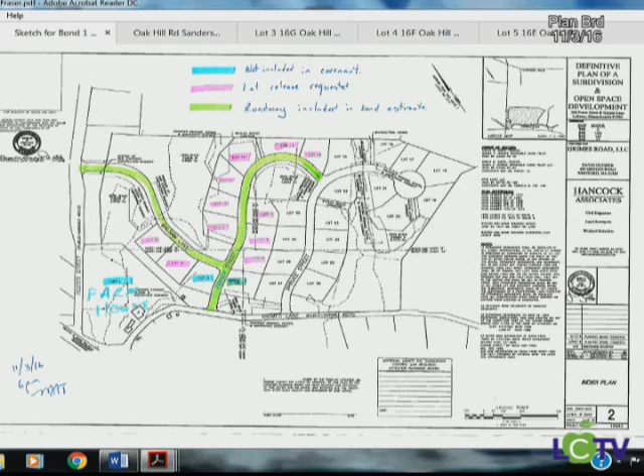So the covenant, the restrictive covenant and the cash bond would be the bond for the subdivision. I don't know how far you want me to explain this. No, we're all right.

So you have a lot release request for lots 2 and 5 through 14. Need a board vote to release those lots. If you release those from the restrictive covenant, that allows him to pull building permits. Any questions?

He's not gonna get the final until the covenant's in place and all the other requirements are met. Is it in place? Yeah, the work, the construction went very quickly on the roadway. There were a few extra inspections, but the inspector liked what he was seeing. He was happy with it.

I drove out there last week, and it does look pretty nice, even the job sites are clean, which is pretty good. They're good to go then, as far as I'm concerned. Yeah, I saw the job site too before I left, and it looked great. One house was up and the foundation was in. There's two houses, one's sided and the other one's, rafters are going up I believe, and that was about 3 weeks ago. It looks clean, looks like a good job.

Do we hear a motion? I make a motion to release the lots 2 and 5 through 14 as soon as the bond is in place. Second. Yeah, once we get the cash. All those in favor? Aye. Opposed? No.

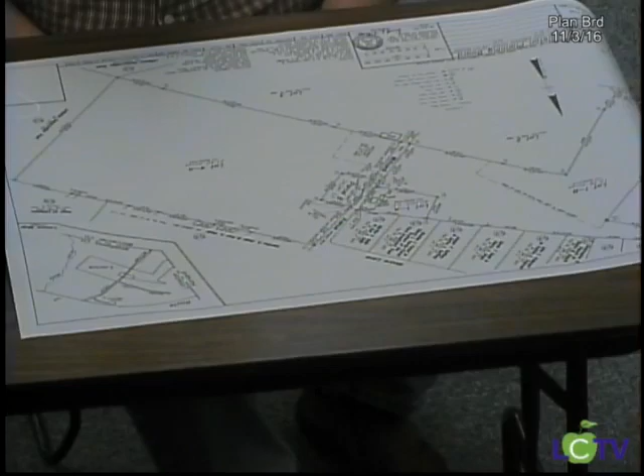So who gets parcel B? This section right here - I believe the house was up for sale and parcel B was created for conveyance, to be conveyed with lot 1A, the house lot beside it, across the street. Yeah, it goes with 1A. Parcel B and 1A are together.

That's 24,000 square feet. How many feet of frontage do we have? Is it going to be on the same deed? That's probably why it's a parcel, because it can't have the road through it, so it has to be two separate lots. How many feet of frontage does it have?

Does it say on here possibly it's not a building lot? It does. How many... is it in the notes? How many does it have? Parcel B is not a building lot - 177 feet, so it could be a buildable lot.

It's 24,000 square feet, I don't think it meets it. Was it subdivided? Right now, right now. It wasn't cut off before and they're just separating it now. Okay, well I don't see any issues with it. Anybody else? I don't either. There's plenty of frontage - Approval Not Required.

Well, that's not the thing. So if you want, I'll make a motion. Motion to approve ANR for 189 Whitcomb Ave as presented. Do I have a second? Second. All those in favor? Aye.

If you could take a couple minutes and just sign it now, we can send him on his way. Do you have a Mylar? If you could do two paper copies and the Mylar, that'd be great.

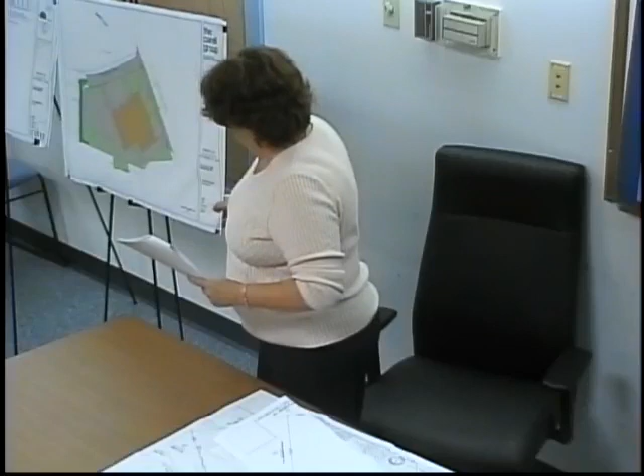With the proposal, a couple of key things: the existing building will remain, the brick building up front, historical, the one that used to be the town hall way back when, and the new building will be built around it and in back of it. So the existing building is roughly along the front, and the addition goes around the back.

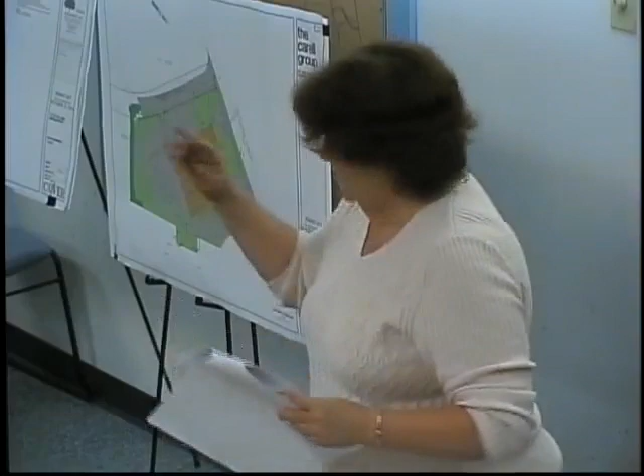The thing about the existing building is that it's not ADA accessible, so one of the key things with the renovation and addition is to make sure that the interior of the building is accessible, and that is part of the design that I'll show you with the building plans in a moment.

The resulting building footprint is 17,600 square feet with a gross floor area of 20,700 square feet. The overall impact to the site has significant improvements over the existing conditions.

Right now, in terms of circulation of the site, the abutter has access to their garage right from the same driveway that the fire department uses. If you were to go out there today, you'd see that a lot of the volunteers and personnel park diagonally on that side. So you have a conflict between vehicles coming into the fire station site, exiting the fire station site, and people parking there as well as the abutter.

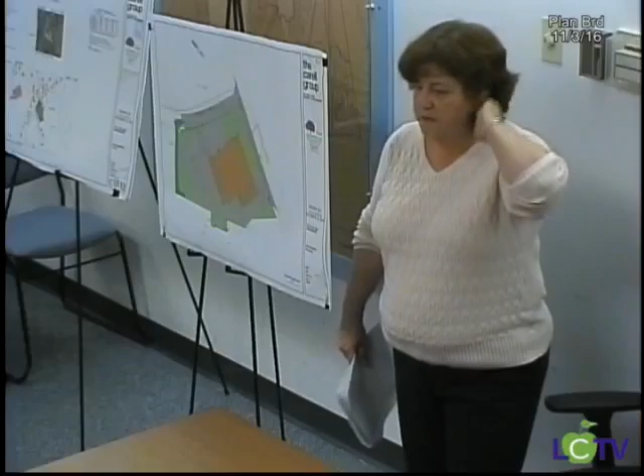Under the proposed conditions, what we're proposing is to allow the abutter to continue using the access to their property. That was part of the agreement worked out with the chief and the abutters. We couldn't find a written easement, but everyone's trying to be a good neighbor, so we're maintaining their access to the site. They also have a ramp area in the backyard, so if they need to get in to prune trees or something, they can get access to it.

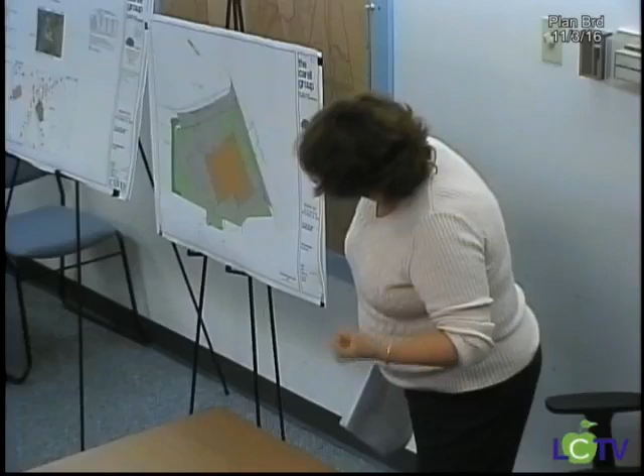So we're maintaining that. We've also made provisions in construction documents to make sure they have that access throughout the construction process. With the internal circulation, once you're past the abutter's driveway, the main use of this access point is going to be to gain access to their small apparatus bays on the side, brush truck, smaller vehicles.

The main parking area has been relocated to the back of the building with apparatus bays and a concrete apron facing Wilderness Road. Because of the heavy weight of the fire trucks and turning movements, we have heavy-duty pavement coming all the way around the building and down Wilderness Road for the distance we expect the trucks to be turning.

So we expect that traffic circulation for use of the station, instead of vehicles turning around on Foster Street, will now be relocating more to Wilderness Road. So it'll improve the overall site safety.

So you're gonna take the vehicles out of the back of it, the fire truck decides to go on a fire call, it goes out the back and turns to the right. Oh, you just said you're gonna pave Wilderness Road more? You're gonna connect Wilderness Road with the parking lot?

Correct. It currently is connected to the existing parking lot, or what is perceived as the parking lot now. What we will be doing is improving the quality of the pavement so it can handle the turning motion of a fully loaded pumper truck or the ladder truck.

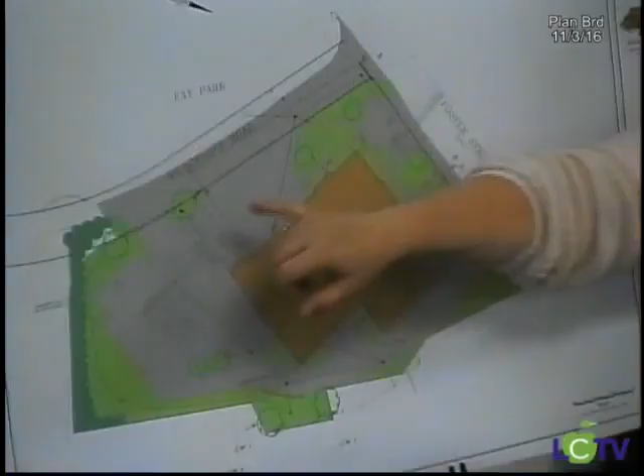We have 25 spaces in back for general purpose. Another feature of this design is the fire station contains a training tower, located in this back corner, so that by having control over the parking spaces in that area, we're able to move the apparatus in and around the training tower, which they'll be using for training, I believe, evacuations and confined spaces.

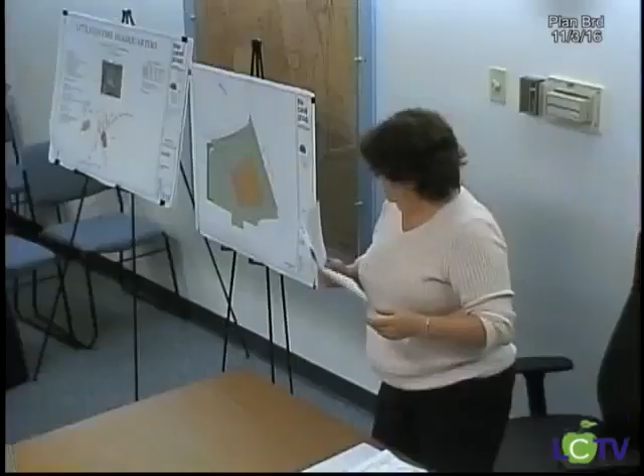It has multiple props throughout the tower. It's basically a two-level system inside that has fire escape material, the metal, and there are grate-type structures that can be removed with anchor points in the ceiling so that we could do confined space training, like through simulated manhole covers, rappelling through metal exterior windows so they could throw ladders to them without damaging any of the brick or anything like that.

Do they have the Hollywood-style fire that comes out the windows? Yeah, we'll work on that.

So I think the key thing here is that the rework of the site plan, the traffic, and the parking has been done with keeping in mind the use of the property.

Is there such a tower over in Westford? They have a larger tower. This one is rather small and simple, but it gives us the ability.

Our goal is to also run a sprinkler system inside. There's a cistern underneath the parking lot so that we could actually draw water from a 10,000 gallon cistern instead of tapping into the hydrant system, allowing us to charge and simulate charging a sprinkler system in a commercial building, giving some of that training. It's probably less than half the size of what they would have in Westford.

In terms of looking beyond just the circulation on the site, one of the big concerns and issues with the Water Resource Protection Overlay District is obviously impervious cover. Under existing conditions, the site is approximately 71.6% impervious, and under the proposed plan, we are at 71.5%.

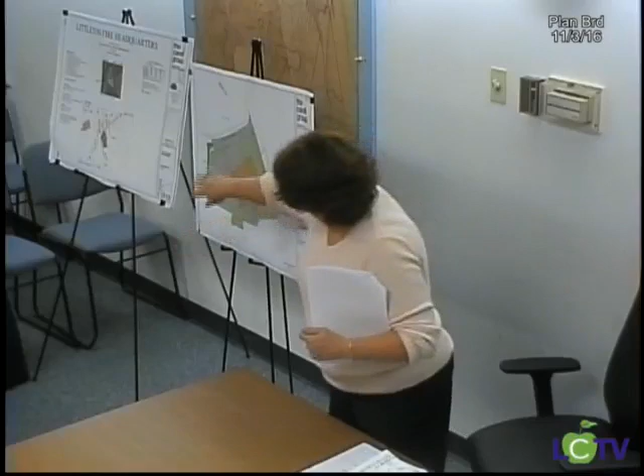Currently, there are catch basins throughout the site and under some of the buildings that capture water from Fay Park. If you've ever been over there, there's a sluiceway so they can pond the water in Fay Park. It works its way through the site and eventually comes to a catch basin out on Foster Street.

We worked with Jim Clyde from the Highway Department to look at different alternatives. What we've come up with is that we still need to maintain the hydraulic connection from Fay Park to the catch basin, so we're reworking it around the front of the site.

This enables us to separate out that flow so that, right now, it gets flushed through the catch basins, and if there's sediment in the catch basin it can resuspend with turbulence and flush through. So this allows the catch basins on site to stay settled. We're also going catch basin to manhole rather than catch basins in series, which will also help.

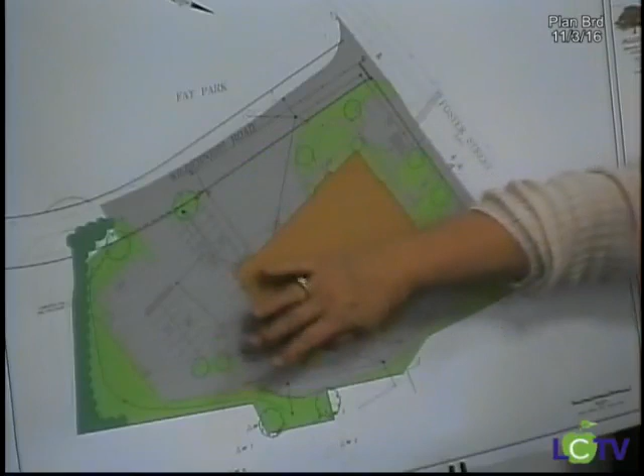The other piece of drainage we have to address is from the abutters. So we're bringing a direct line through the back of the site, picking up the abutters' drainage. I believe they have an interceptor drain, a foundation drain, and a yard catch basin because they have a trapped area, so we are honoring their drainage and bringing it up front.

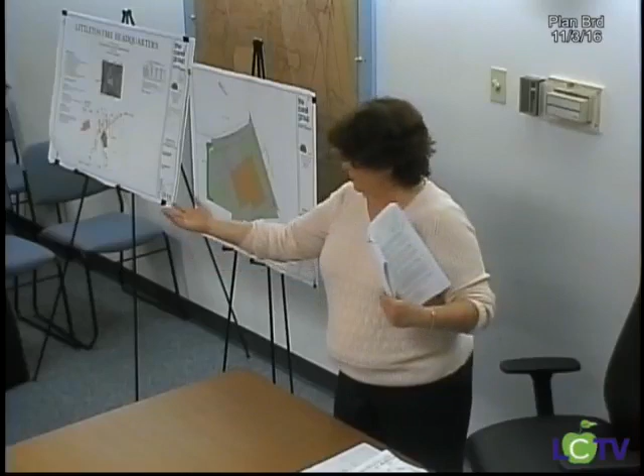We have a catch basin here which will help top off the fire cistern that the chief mentioned, so that they can practice with a dry hydrant. That will overflow into the drainage system in the event that they recharge more than what was there.

So all the drainage will be coming through the front. We're adding the eliminator, which is an oil and grease trap on all of them, so we're getting some improvement with the water quality.

The couple of other key things we're doing is we've shown a snow storage area out back where the snow gets plowed now. And behind that, we're creating a grass swale. This will give us an opportunity to let some of the sediments from melting snow settle out.

We also are proposing a roof recharge area in the front of the station to capture a little over a third of the roof area to get recharged. When you look at all the drainage numbers, it shows that we have a decrease in runoff. It's very minimal, but I think the more important thing is we're trying to encourage recharge where it is reasonable with clean water versus what we have currently on site.

The other thing we're doing is there are floor drains in the apparatus bays. Right now, if water drips off the trucks, it flows out the bay door. The floor drains will all be connected to a holding tank, so that water will be collected. It's a double-walled holding tank with alarms, and when it fills up, it'll be pumped off and taken off-site. So there'll be no connection to either surface or groundwater from anything dripping in the garage bays.

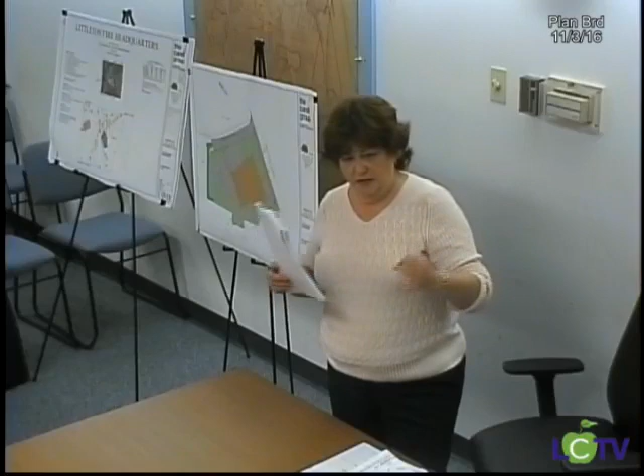That tank will be double-walled. It'll have a drip pan to capture it. It'll have alarms if anything enters into that overflow. And it'll have all the environmental precautions that this board normally would require of any type of fuel tank. So that would be the generator.

The other thing we're doing is we've got bollards all around it so no one can accidentally back into it and jar it.

Other utilities are being upgraded. We're upgrading the water line in Wilderness Road. Right now there's a 6-inch asbestos line, and we will be upgrading it to ductile iron, and that'll also improve water quality. And that's where we will be getting the fire flows for the fire station. Domestic water will be coming in off of Foster Street, as will the gas and electric.

That covers the site sort of in a nutshell, if anybody has more specific questions.

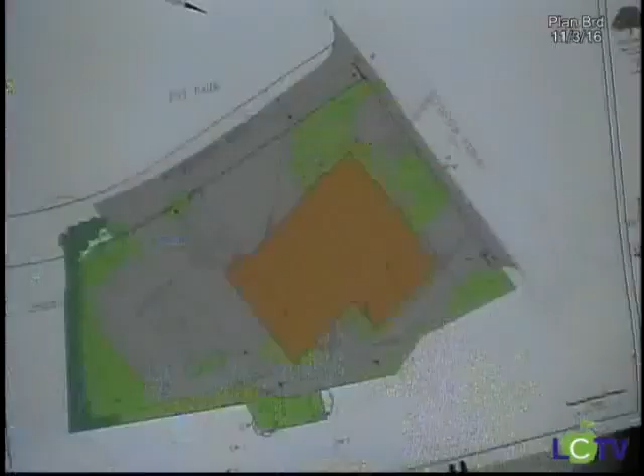So there's a line that runs along the back perimeter, it's kind of a horseshoe-shaped line. What is that? That is, in the grass swale area, our concern was if snow blocked that swale, we wanted to make sure that we could capture the overflow and bring it around to the drainage area. So it's a sub-drain where we've heard that there's water leading out of the hill, but also in the event that the swale gets blocked. Like a French drain? Yes.

Okay, very good recap. Chief, when looking at the impervious area around the new fire station, I understand you need the asphalt for the apparatus. Is there no place that you can decrease some of this impervious area just so that we can get some more recharge into the surface?

Not in trying to maintain the parking. We actually reduced some of the parking in the back already to do that. And the one area that we did increase the grass surface was along this area where we currently have the parking for the call members. We're eliminating all of the parking for the call members, and we actually bumped out the grass surface here about 20 feet, so that it more than doubled the current island that's there now coming into the building.

So that will just remain as two-way traffic in and out on that side. So that was the bit larger spot that we were able to increase, and then it was also a change up here. But in relative to the whole site and trying to maintain some of the parking, we're only able to reduce it by that 1%.

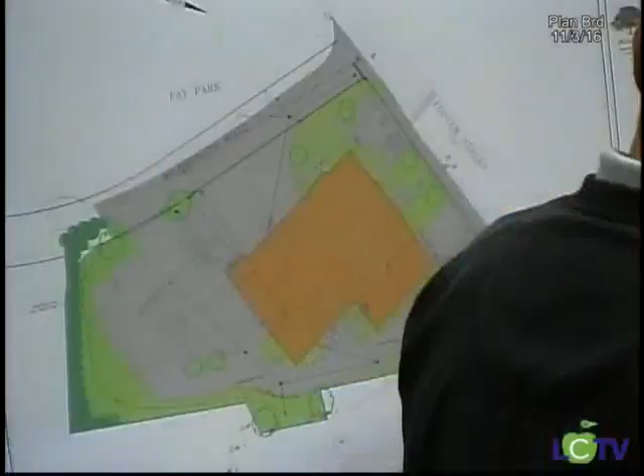I apologize, I forgot to mention, over on the side by Wilderness, which is currently a sea of pavement, what we've got is flag poles in an area for a monument. We don't know what the monument's going to be at this time, plus a bike rack, so it's a quieter area, whereas right now there's parking.

So in line with what we've tried to do down in the village center with the green up front and pedestrian friendly up front and the parking in the back, this fits right into that.

What is the impact of this going to be on the church across the way? You've got 5 spaces, but how many spaces does the church currently use? We have 25 extra spaces in the back.

And how many are used by the church? We know there are people using it on the side, but I don't know how many go further back. Currently there are 20 spaces on the side lot, so this increases that by 5. When the police station used to be there, that was all police parking. So the general parking overall will add 5 more to the 20, on top of the spaces on each side of the Historical Society and up and down the road.

Are they going to be able to get to those spaces in the back? We have a sidewalk coming down the side, and they would just have to walk across. Just not during construction.

In seeing this, I see that the reserve parking is closer to the station, and being healthy firefighters, I can see that you could give these spaces, the reserve parking, to the public and maybe move the municipal or staff parking to a different location. It's not necessarily about distance, it's more about time, not about cost. The reason we decided to keep these reserved for the call members to come in is this is in front of all of the apparatus bay.

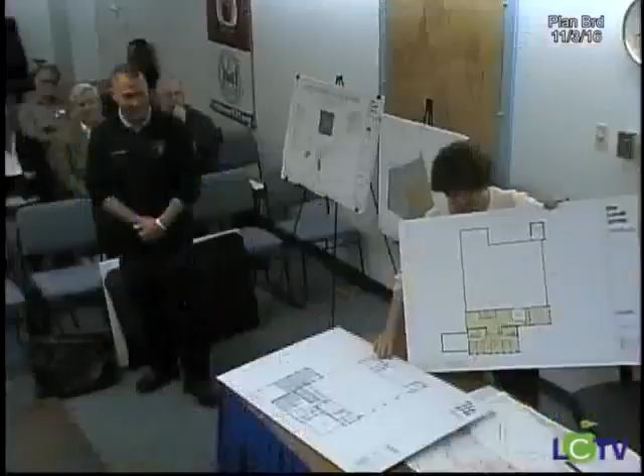All right, next. I will briefly go over the building plans, just because I know you have a lot of other things. You're ten minutes past your time, my dear. You want me to just flip through them, or show them? Flip them. All right, I'll flip through. So, Reader's Digest version.

This is the first floor, the existing station. It's used mostly for public fire prevention and administrative type things. The apparatus bays are the main body back here, and the training tower. We have a carport in the middle of the building where they'll put their specialty trailers undercover. In the back of the existing apparatus bay is where we'll have administrative offices.

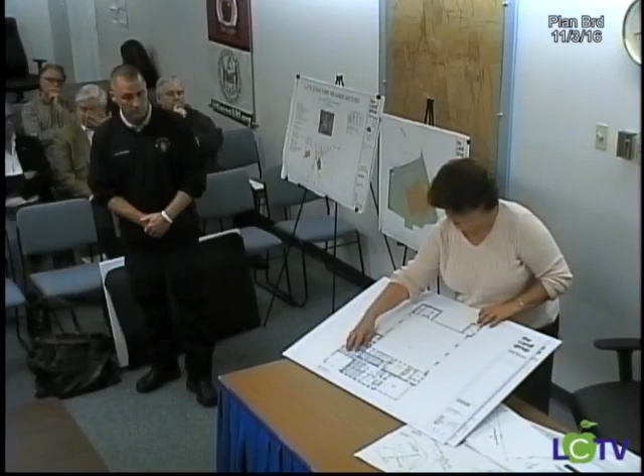The garage in front, the bays in front, will remain and will probably be for the chief's vehicles and smaller vehicles. What is the big space for? It'll be for the utility vehicles, the boat, the ATV. The bottom right is the ATV space, right?

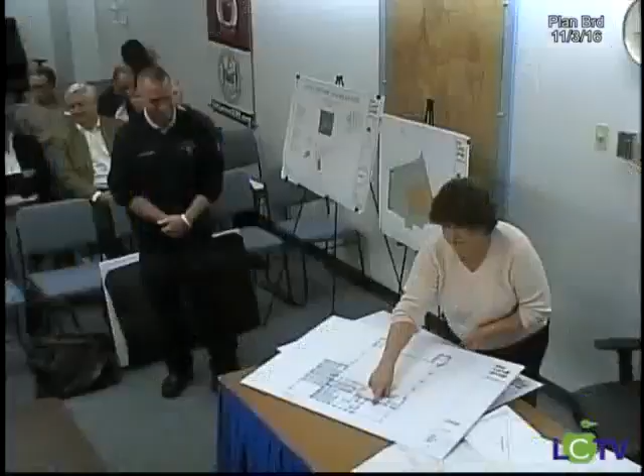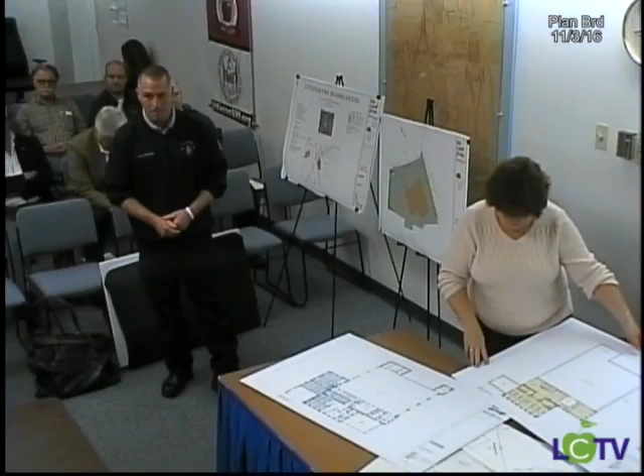That is a meeting and training room. Is that going to be public? It's a public training space that'll accommodate about 48 people. It'll have all the same features, camera, audio, cable TV, and also has its own room so they'll be able to watch recordings and have it broadcast live. It'll be open to other organizations. We can move our meetings over there if it makes you happy.

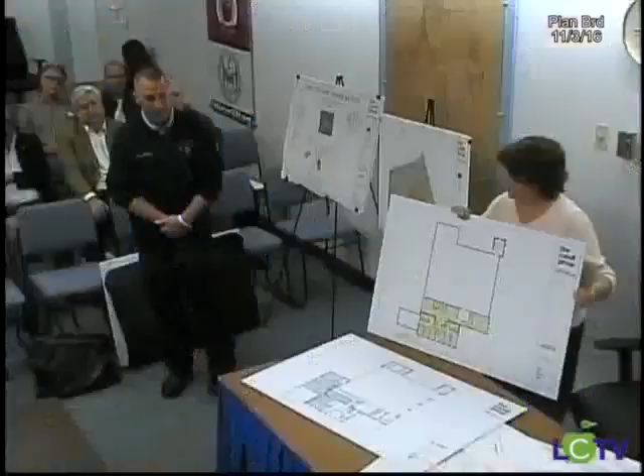The second plan is just the upstairs, which shows bunk rooms for the firefighters, a day room, fitness room, kitchen, basically the staff area. What's in the fitness room? Fitness stuff. That's why you got a training tower, you can carry each other up and down the stairs.

We'll do that too. And then we have the architect's renderings of the building. Oh yeah, there's the conference room in the front, and the tower in the back.

Any other questions, so we can move this on? No, it looks good. Okay, I gave you a draft decision. My only question was to make sure I had the details of the generator, and Sue and Scott sent those over, so I'm good. But you would need to close the hearing and vote on the Water Resource District Special Permit application and the site plan.

Do we need a motion to close the hearing? I'll make a motion to close the hearing. Does anybody else have any questions, or any more from the audience? No, we're running late, so we're going to get moving. Second it. All right, all those in favor of closing the hearing? Aye.

Vote on the site plan. I'll make a motion to vote on the site plan as proposed. My questions were answered, so. Second? No discussion from me, I'm good. All right, all those in favor? Aye.

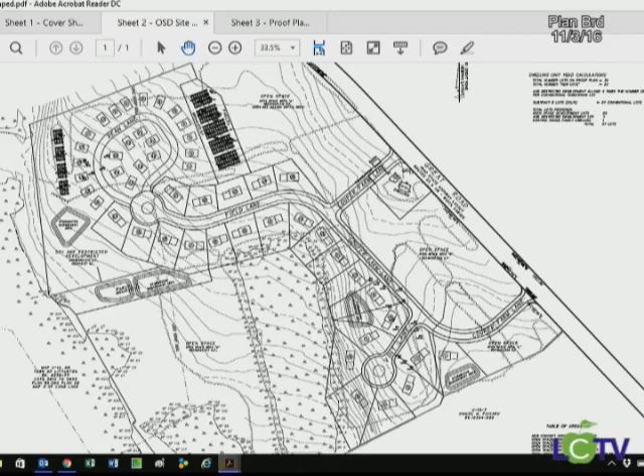And the pathway that connects to the pathway we were just talking about, where would that be? If you look up at the screen, I can put the cursor up there. This region here is the subdivision you were just talking about. What they were talking about, the wetlands crossing or that wet area, is right in this area, and there is an existing path that connects these two properties together.

So we'd be utilizing that same path, increasing its size and making it more accessible. That is the location of the path, and it would come in this way. The existing path actually comes this way, so it would still follow the existing path. It would bifurcate at this point, where it would come around the back into this big open space.

There are also trails that run along the perimeter right now, actually through this little finger of wetlands. Is there a way to connect that path to the circle or to the private road? Yes, so at the bifurcation it would come this way also, around the back of the units, and then up along the property line. Oh, I see.

Connecting up to the sidewalk, to Great Road. Yes, there's a sidewalk on Great Road. Is there a sidewalk that far to Great Road? Yes, there is, right to the border of the property. It's right at the corner, to be redone, but it's there.

Part of our agreement is to go from where it needs to be repaired all the way to the subdivision, and that path will be built to bicycle standards? Well, we're not paving it. Out on 119 it'll be paved, and then in our host community agreement we have it as just either grass or stone dust walking path all the way through.

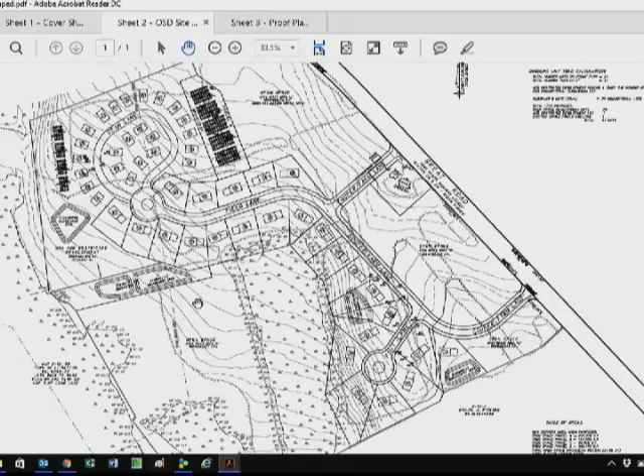The walking path exists on the paper road currently, right? That's good enough for now. Can I still see a plan when you come before us next time? I wanna see a paper plan.

That's all I got going on this week, Jim. I understand what the bike and pedestrian people are trying to do.

I guess the town side, and I'll call it the board of selectmen, are gonna have to weigh in on what are the repercussions of the maintenance if you do a paved path at 6 feet. Is that a year-round path? And what's gonna be required of the town on the maintenance side?

They're trying to get people out and exercise, so we're gonna get them all shovels. Peter, I'm one of those bicycle guys. Well, get on your shovel and start shoveling some stuff. I mean, I'd just like to know what are the repercussions.

I think we need to look at the drainage issues, things like what we did at Cobb's. There's gonna be some maintenance that comes to the town side on those paths, right? Possibly, yeah, part of the development.

I just wanna understand what our role would be in the paths built there in the future. Well, that's a good discussion, Jimmy, we'll save that for a little while later.

We're an hour at least behind on getting through this. Going forward, could there just be one thing for Mr. McNamara - at the bicycle end of the paths, the community host agreement will be talked about. Please wait a minute, go ahead ma'am.

Thank you. At the end of the host community agreement, that old plan is attached. Actually it's my copy, I'm happy to give you one. But that doesn't show all the land going up that way. You cut it off before it gets there. Because we didn't own it back then, we didn't have that under agreement, so the old plan didn't show it.

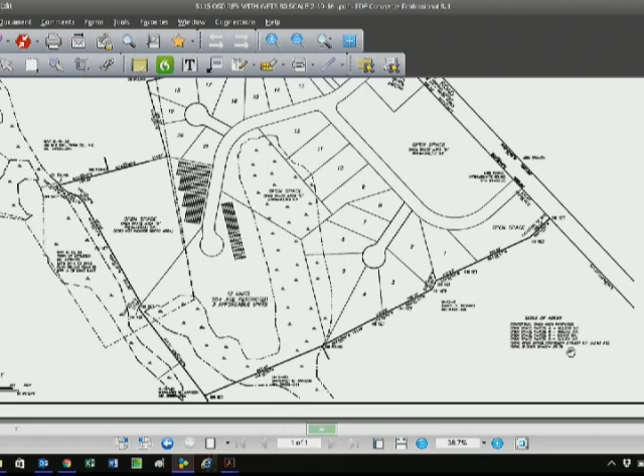Well, let's give it an actual number. The proposal of this one was 549,000 and something, I can't really read it - so 550,000 square feet of open space. And we're now proposing 953,000. That's all I wanted to know.

Yeah, it almost doubled it by putting that in there. So you answered my question. Okay, thank you. And we're still getting open space on the golf course.

Would you like to see them again in December? Yes. Okay, and December if that works in their schedule - the fastest, because it doesn't seem we're having a lot of issues or problems here.

Do you want to show Green and Kirby? Yes. Not ready for definitive - we want them to show the walking paths on it, show other details, and then close the hearing. It's not a hearing, it's just a discussion. End of discussion.

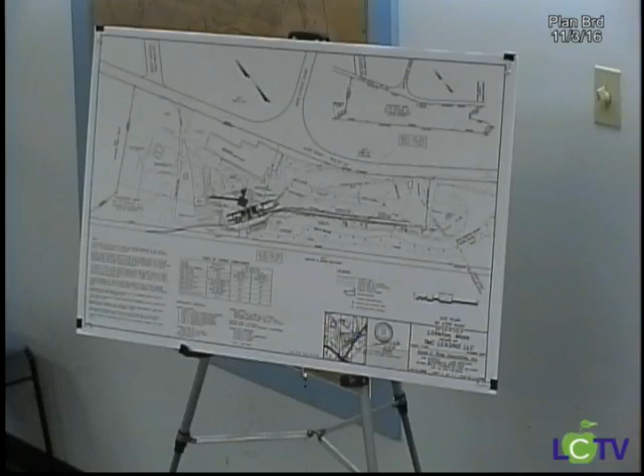Right, so it's again similar to what we proposed last year. The stormwater management systems that are currently in place are designed to handle the flow coming off of it because it's all currently impervious. So are you gonna be a batching plant, or are you gonna be a distributor of batching materials?

Two things are happening. We have the ready-mix plant, the normal ready-mix trucks that you see up and down the road. Those silos will have cement. The new company they're coming out of is Massachusetts Ready Mix. The other company, which is McInnes, will be selling us cement. They'll also be selling other people's cement too, and they'll be picking it up at your location. The dry cement, the product, the ingredient that goes into ready mix.

Do we need lawyers here? Because it's like it's going for three different people at the same time. Well, we want to make sure that you know who's doing what. Oh, all right.

All right, do we need a vote? On the site plan, yeah. The only suggestion I had heard was to ask whether they're updating any of the landscaping.

There's monitoring going on that site now, right? Yeah, there's monitoring wells everywhere. We did all that. What are we gonna landscape, the swamp? What about all the extra material, the equipment that's out there?

This is just gonna be for your use, right? All the other stuff, the trucks out front, that's still us. The yard is all our stuff. There's no tenant, no lease, nobody. You're Middlesex, right? Yeah.